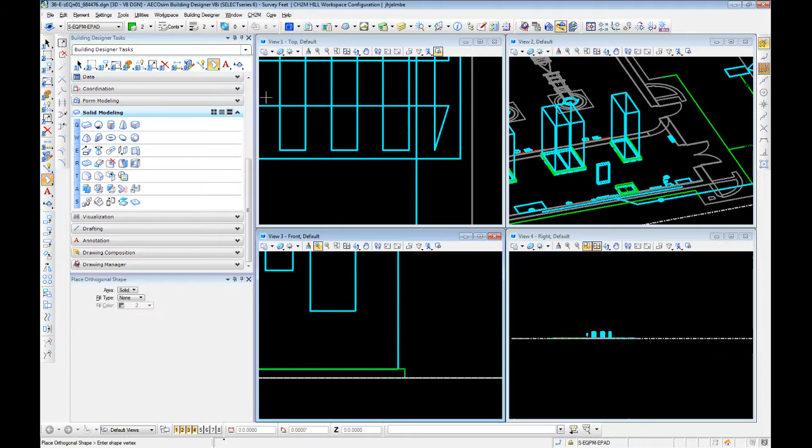We can create irregular polygons and extrude those as well, very similar to what we have been doing. It's pretty much the same steps.

We're going to start in the corner of this pad, change this to S, go here to beam... yes, bracket, let's use bracket. Let's create a steel bracket.

We're going to create a little piece of channel that this transformer is going to live on, because it has feet on top of being on top of a slab.

You would create an appropriately sized channel. So let's go 4 inches by 3/8, 5, which is actually some pretty thick channel.

But by using orthogonal, we are automatically locked in. So we're going to minus 375... nope, I missed a period. 0.375, there we go.

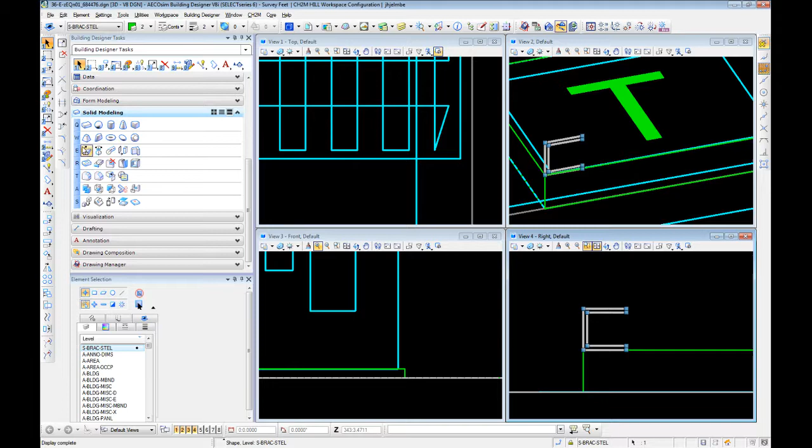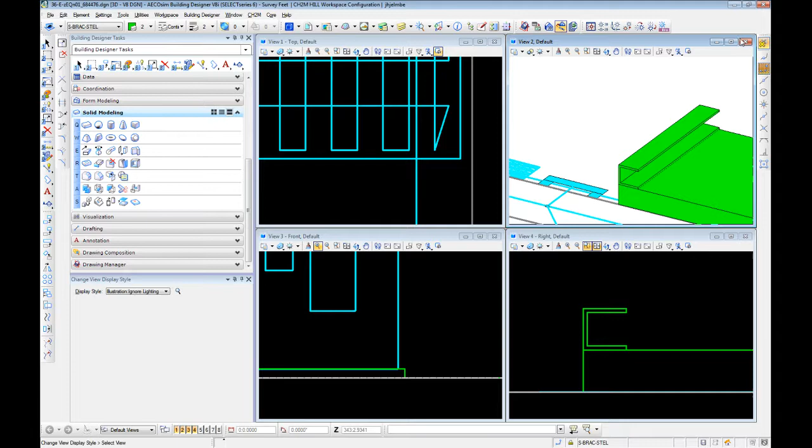And extrude out our transformer feet. It's kind of hard to see it, so let's go ahead and change illustration, ignore lighting. Haha, there we go, and you can see it just a tad better.

So we have equipment pad, steel brackets. Let's go ahead, we know we need to mirror that to the other side, so we'll select it.

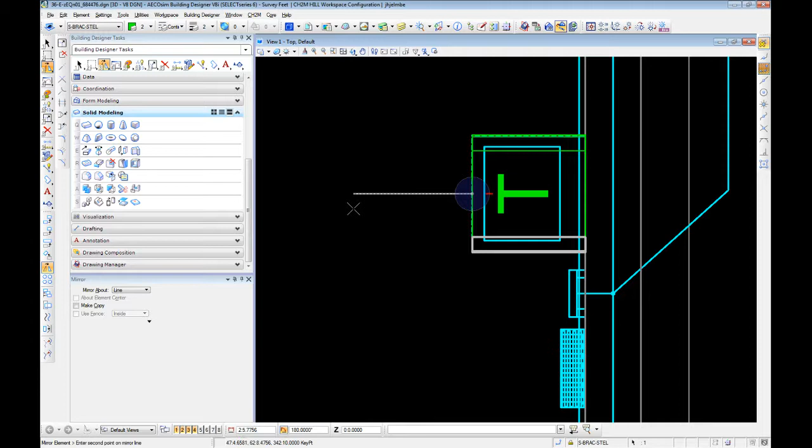And here under our manipulate, use a mirror. Prefer to use a line typically. I leave it set to line because I have the extra command of flipping between horizontal and vertical.

Ah, I missed something, make a copy, because I didn't just want to move it, I want to make another one. There we go. So now we have our bracket feet.

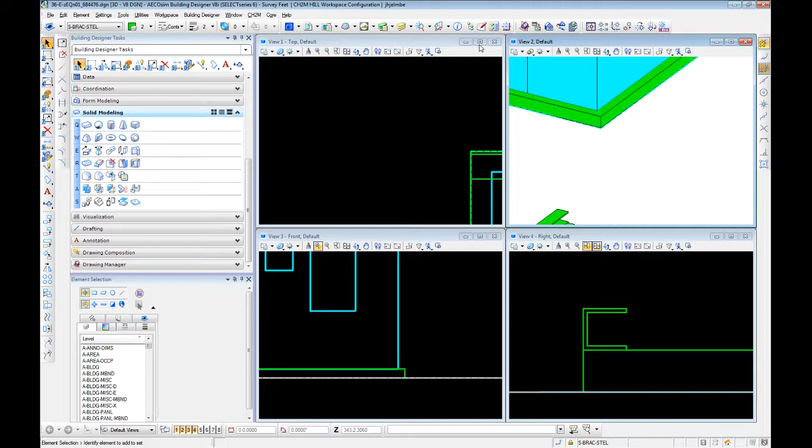Our last step, we need to set our actual transformer. And you'll notice something, I was off. So we have the pad size and then we have the transformer size. Let's go ahead and move our brackets into place to our transformer outline.

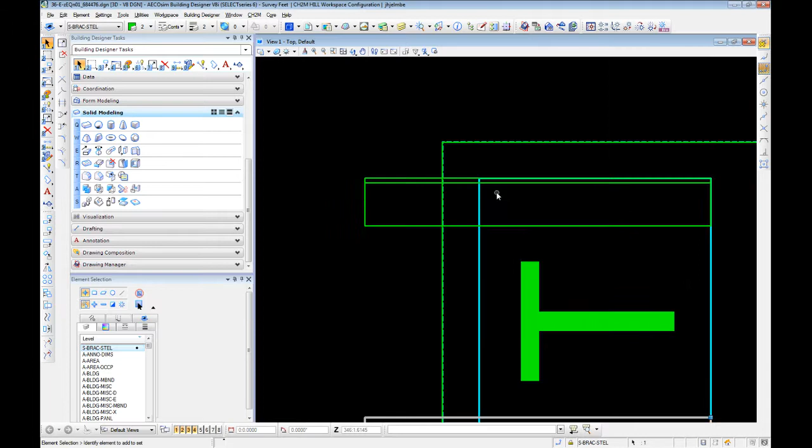So, tentative, using enter to lock our axis so we aren't moving things around in 3 dimensions, we're just using 2 dimensions. Now you'll notice there's this one little handle here. This allows us to alter our extrusion length. You'll notice it's still picking up that Z distance.

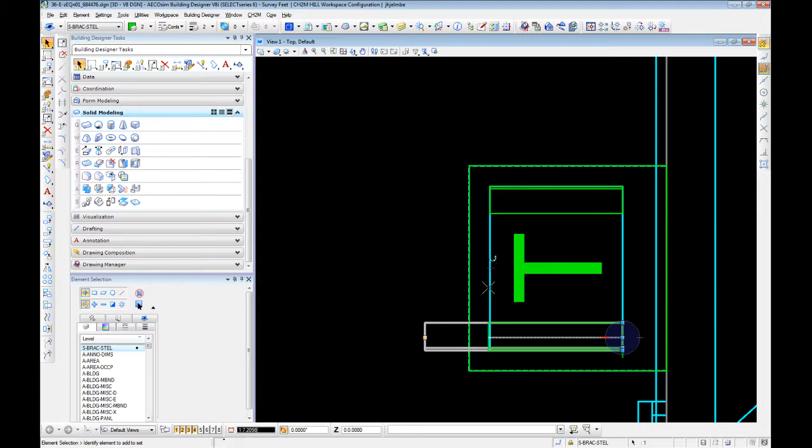So we want to hit enter to make sure we are only editing it in that one dimension. There, now we have 2 little feet.

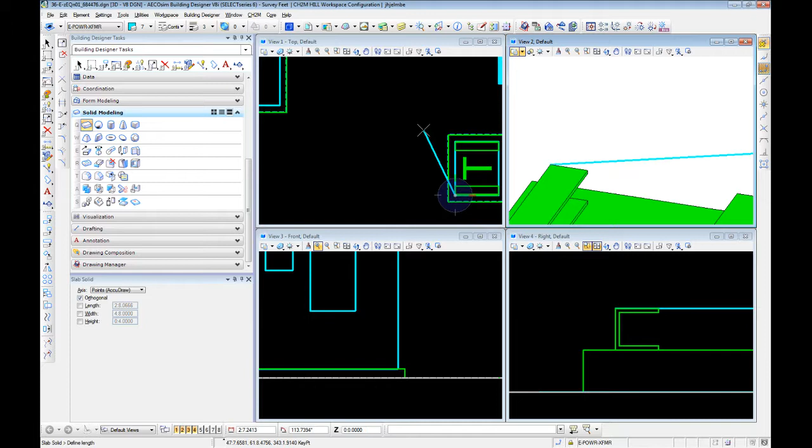I'm doing what we did earlier, hold Alt, left click to change our level. And let's create our transformer. Enter.

Remove ortho temporarily, let's say this guy is 2 feet tall. Hooray! There is our transformer. And we've made something, yeah, a little bit more detailed.

Now there's 2 things you could do. You could go ahead and combine these into a single model using the Unite Solids command. In this case, we want to leave them as a group because they're separate elements, we want to keep them separate.

So we can go ahead, using Control, you can go ahead and use U and left click. Oh, come on, that's... oh, that is not correct. Okay, so Control U... no, gonna need to edit this one out. Select Control G, there we go.

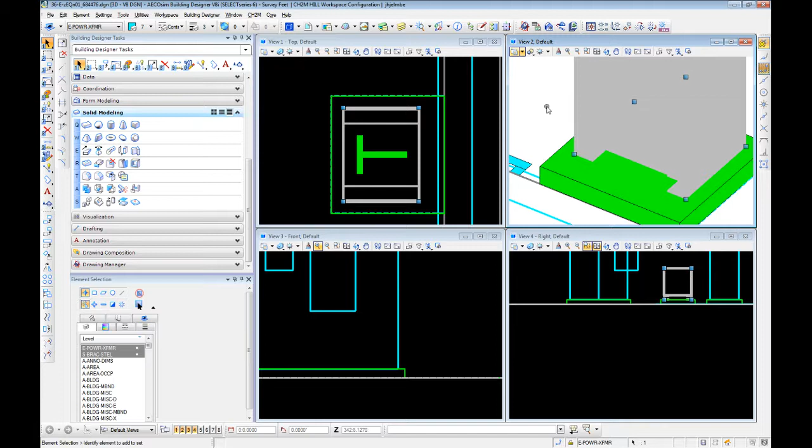Control G unites the group. If you want to separate it back out, then it's Control U. So there you go, so let's go ahead and make this a group. So select everything, Control G, and now it's a group.

It can also be found, it's up here somewhere, let's see, where is it? Trying to remember... oh, where did it go? It's gonna bug me, anyway, it doesn't really matter.

Control U, Control G creates your groups. This is extremely useful when we get into compound cells, and we will revisit it then.

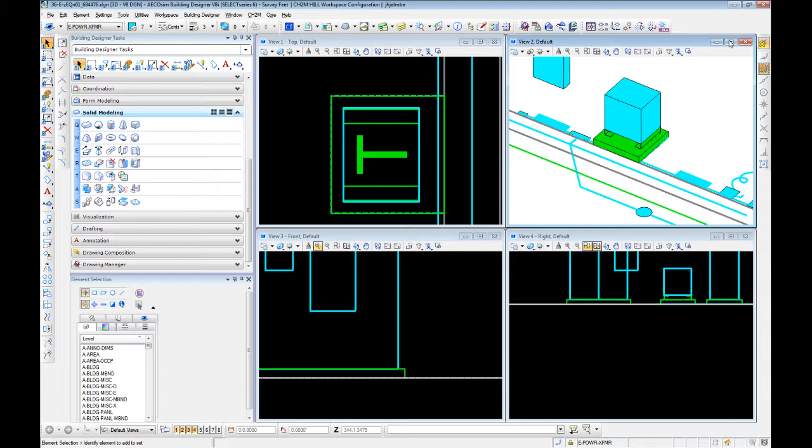So there you go, there's creating our rudimentary rectangles. Creating your other solids is pretty much identical. So let's say for whatever reason we needed to create a cylinder.

Start with your cylinder, so if we want to create it at the center of this motor we kind of drew in 2D initially. Come out, you can lock your axes. There's our rough shape.

This is, I was talking earlier about your UCS not letting you go in the direction you want to go. Select your view, hit V to rotate your UCS, and there we go. We can now make our 10-foot tall cylinder.

Each of these shapes can be used for various reasons. They all work very similarly in premise to our slab solid. Your pyramids and the rest of these take a little bit more finesse to get to work right, but we don't typically use these shapes unless you're doing some very detailed modeling of rather unique equipment.

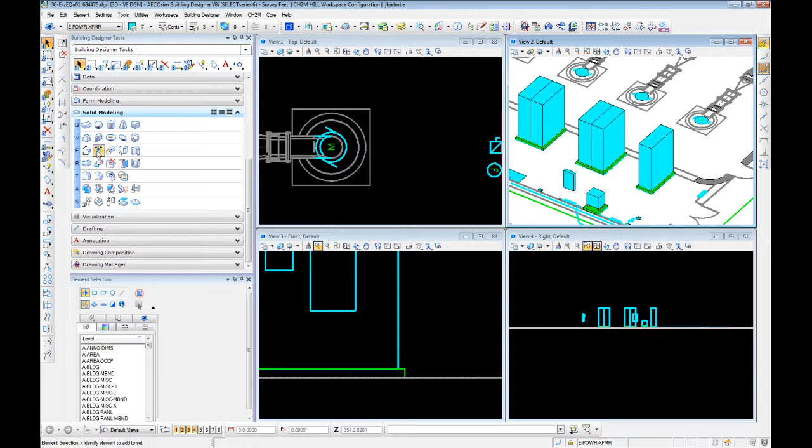The next line down that has our extrude by solid, you can do a revolve. If you're doing very detailed models, we have some in our compound cell libraries, which we will get more detail in, that use that revolve command.

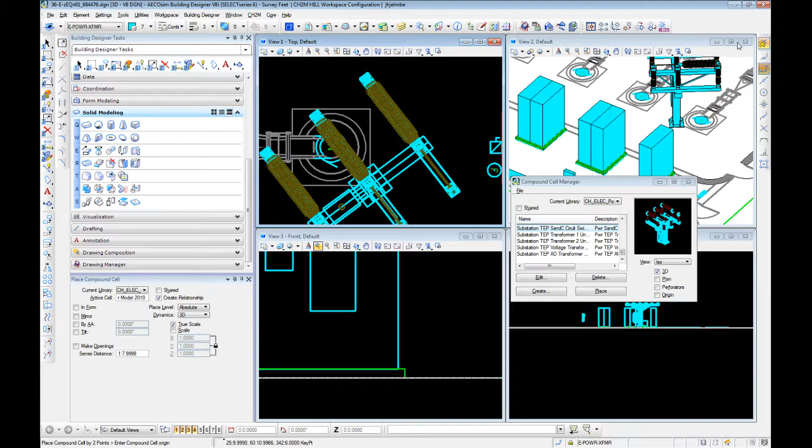So if we place this guy temporarily, see the use of that revolved pattern symbol or creation type that was used to create the isolators on this.

We'll also use extrude along path. We will get into that when we do duct bank modeling, also use that for conduit modeling, which we will get into at the same time.

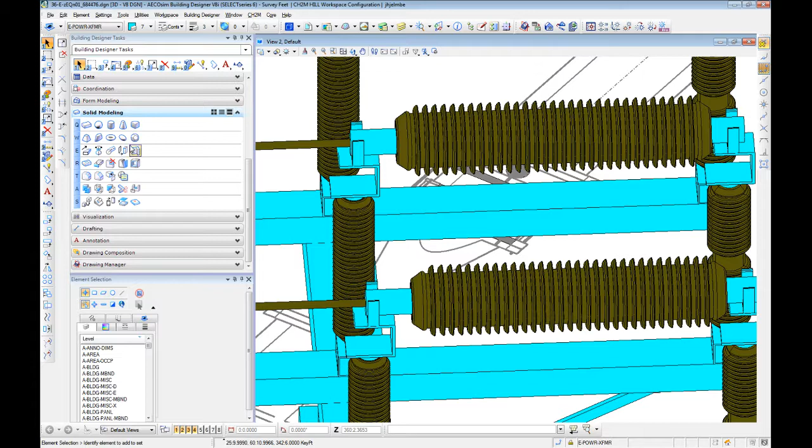We don't typically model in surfaces, so unless you're importing it from, say, Autodesk products, you won't normally use that tool. You could also do a linear solid.

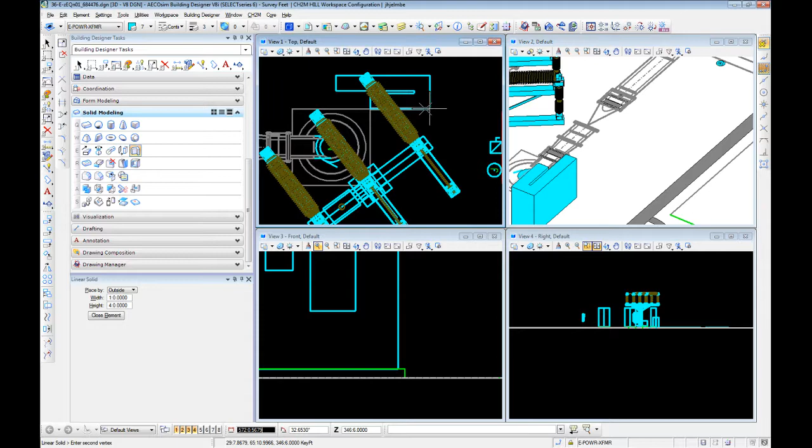This is similar to what we were doing earlier. So you can set and create various linear solids in the process.

All right, that wraps it up for this video. Next, we will get into modeling duct banks and conduits.